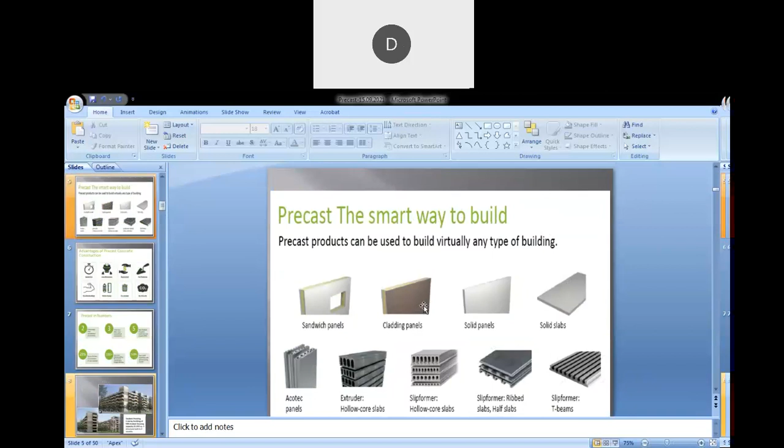Sorry to disturb you, sir, your slides are not changing. Please go to full screen. I am already in full screen. There are many slides, which slide are you on? Are you still on the first slide? No, I'm scrolling it down. And now it is visible. Sir, please make it full screen for a minute. One second. So what can you read? Can you please read out the screen? It is not going to full screen mode. No, I have made it full screen, but it seems only you are seeing it that way. We are not able to see it. I don't know why. Just hold on please, go to the view option. I am already in view. See, it is there, you are sharing the window, it is very well there. You are seeing the screen now, with all your settings. Now I will stop sharing and share again. Yeah, better we try that, sir. Yes.

Am I seen? Is the screen visible? Screen is visible, sir. Now, if I... No sir, it's not coming. My bandwidth is completely healthy, my internet speed is very healthy. I checked it, I don't know why. This should not happen.

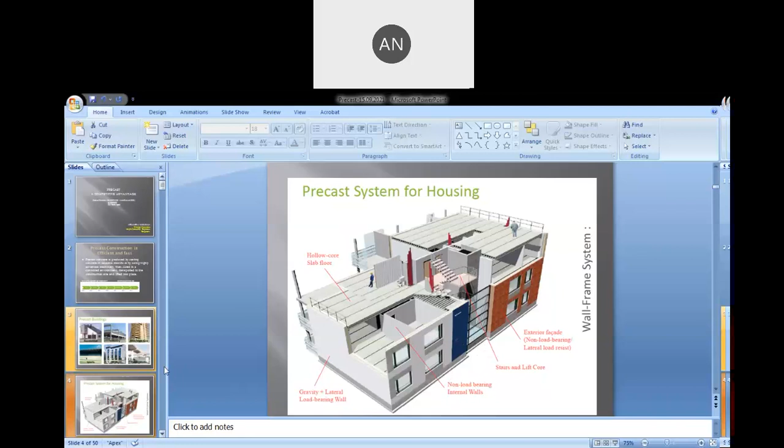Now, precast system - any component involved in building construction can be answered by precast technology, right from footings to terrace. Any component of a building can be precast. Flooring systems like hollow core slabs - there are many options. Precast is a smart way to build because it can answer flooring systems, a lot of options are available. Bridge decks, solid slabs for floors and also for walls - all these sectors, half slabs. These are some things like the hollow core slab.

Can you see my cursor moving around? Hollow core slab, half slabs here - it is half of this. So this is also a wonderful tool for the construction industry. It can save a lot of time.

Advantages of precast concrete construction: it is fast, yes. It involves low manpower, yes, because of repetitions involved even during manufacturing. Economical, yes, only if there are volumes - if it is constructed in volumes, it will prove economical. Form finishes will give better appearance, so plastering can be avoided. Durable buildings, quality control is achieved.

Yes, it is durable. Most of the architectural demands, most of the forms in architectural demand can be answered through precast, so better design, better appearance rather. Wastages are minimized because these precast elements are prepared or manufactured in a controlled environment, so wastages are minimized, so it is eco-friendly as well.

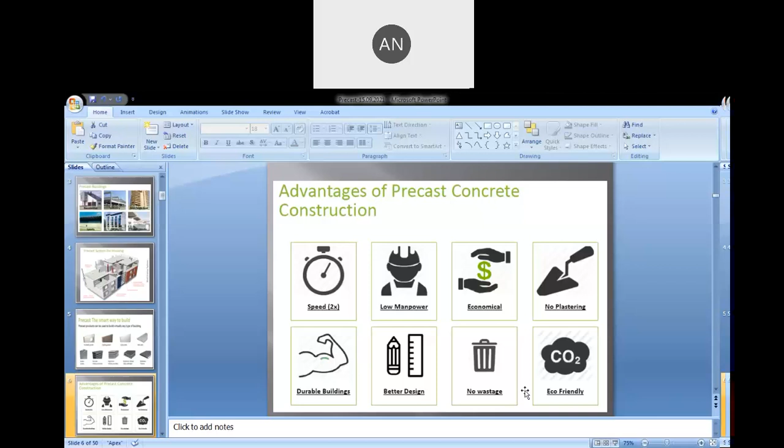Precast, if we give numbers to it, is almost 2 times faster than our conventional construction system, and 3 times less labor involved - this is, of course, from a report. Almost if you talk about machinery and molds involved in manufacturing of precast elements, the capital expenditure involved, the payback period for that capex is 5 years on an average.

So 25% less consumption of raw materials, yes, because it is manufactured in a controlled environment. Life of the building is improved, certainly more than our conventional construction system. Molds can be repeated over 5,000 plus repetitions, which is a very added advantage even to the yard. Finally, it proves very economical, of course, rather, when there are volumes in construction.

Certain snapshots of precast structures in India which have happened earlier - just to give us a glimpse of the advantage this precast technology can bring in.

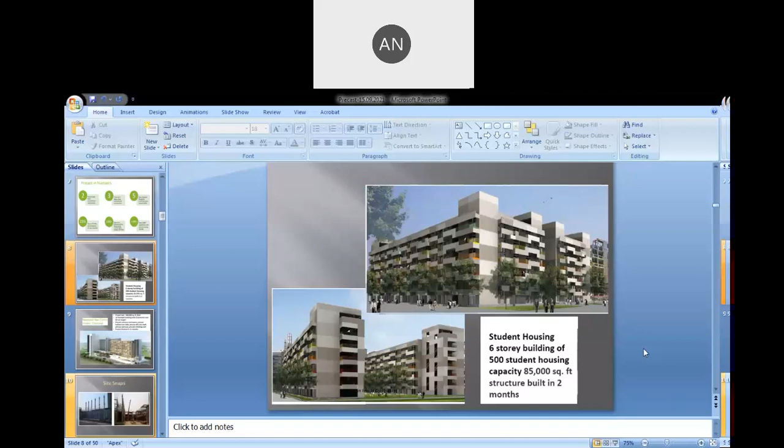This is one more hotel in Chennai, 3 lakh square feet built-up area, 14-story building, hollow core slabs for floor, precast hollow core slabs, precast columns and beams involved, precast lift core, shaft, precast staircase, retaining walls. It is finished in 11 months - it's one more testimony.

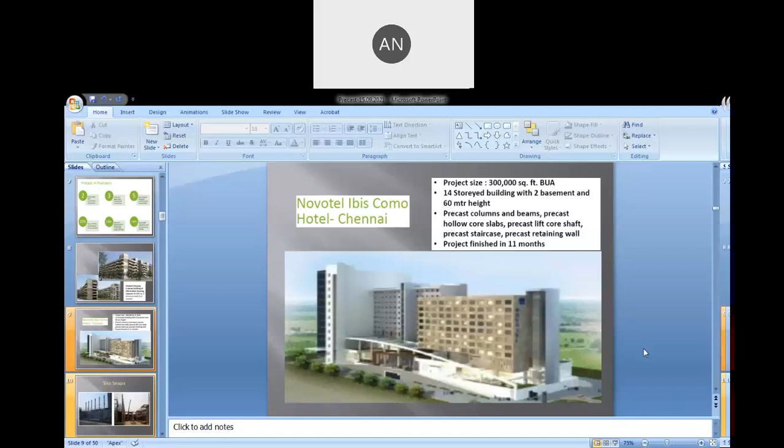A general glimpse of how a column along with corbels looks like. The corbel will receive horizontal members, beams or slab. This is how it looks when it is in progress at the site. This is a snapshot taken when the site is in progress.

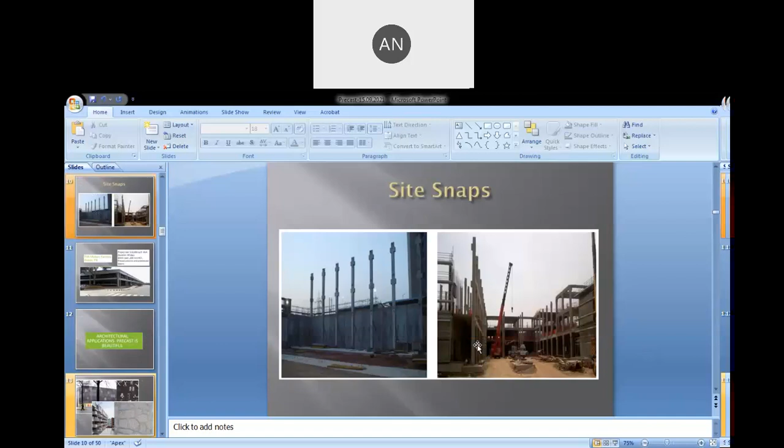Not only manufacturing, now when we talk about precast industry in building construction, it is not only the matter of manufacturing the structural elements to quality. One more very predominant thing which a designer or executing engineer should see is how to transport it to the site and place this geometry where it is intended to go.

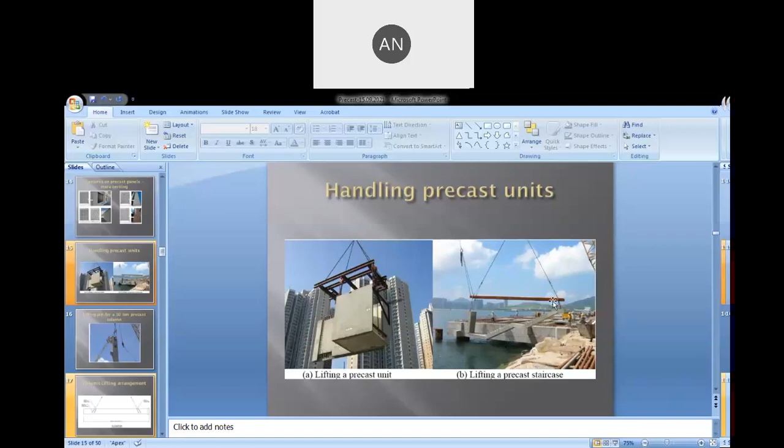Putting it in place, you can see certain photos, snapshots of lifting a precast unit and erecting it at heights, hoisting it to heights. Horizontal elements too - here it is lifting a precast staircase and placing it. You can see that in this photo.

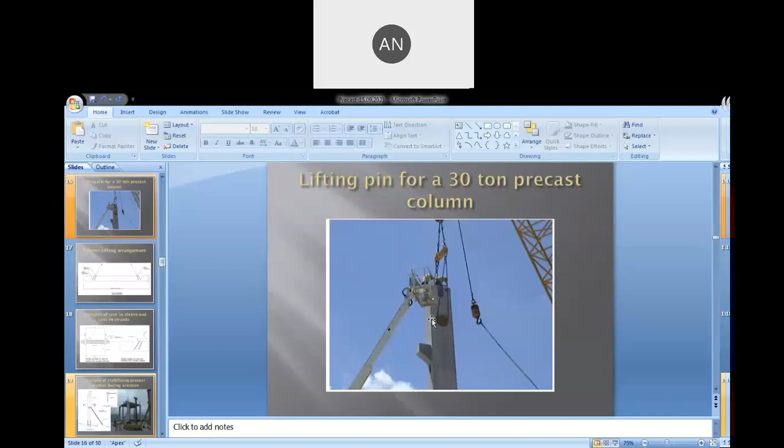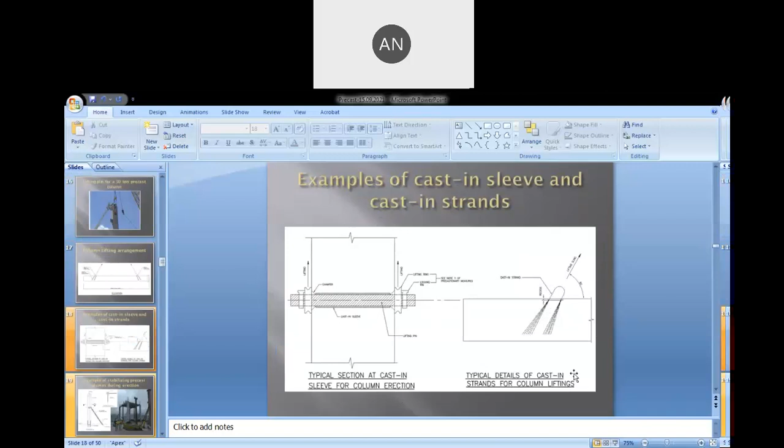The eye we saw - I will just go to the earlier slides. Here, this lifting pin we are talking about, this detail is shown below. Typical details of cast-in strands for column lifting, which we saw in full - it is a part view of this view.

Hollow core slabs, beams, and decks - I think I have to share another file. I will do that later. I will show you hollow core slabs, beams, and decks in a different file.

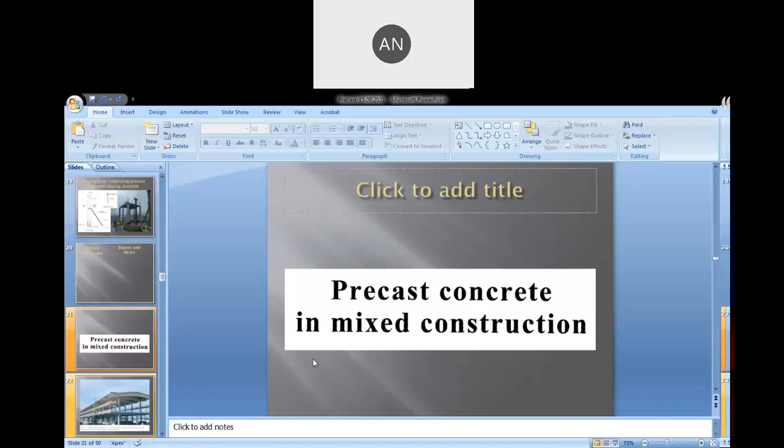Precast concrete in mixed construction - how does it look like? See here, it's a mixed construction using precast concrete and timber. Columns are precast, while the floors and roofing system comprise timber sections and roof.

Recently, I was involved in one project in Iraq - a building for public affairs, the Ministry of Human Affairs, Iraq. There, the facade system was made with a foam concrete facade system, just to minimize load. It was around, I think, a 75-story building.

There, using wind tunnel inferences, we had to finalize the sections and design the facade for that building.

That is again a precast example. Now see mixed construction using precast concrete and timber, both indigenous materials local to the construction industry, in Norway. It looks very charming and beautiful.

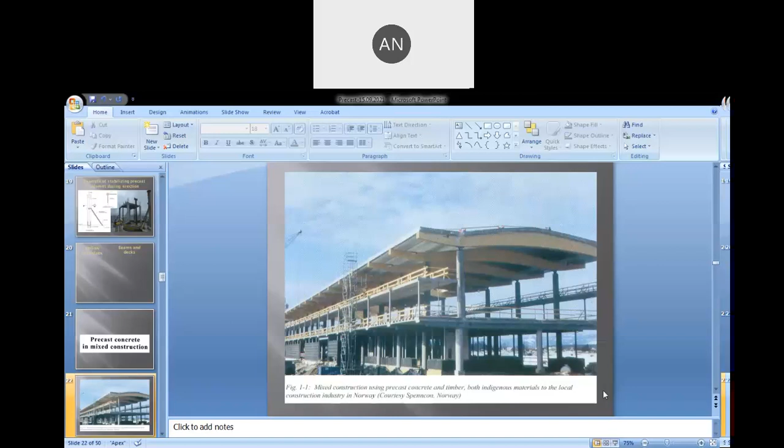This mixed construction is also possible with precast, mixing precast concrete and structural steel works.

Precast concrete floors and brick pillars form both the structural elements and the architectural facade. The statement is its appearance.

See other materials that can be integrated with precast concrete: structural steelwork and timber roofs on precast frames, precast floors into steel and concrete beams and masonry walls, profiled metal decking on precast beams, and precast frames into cast-in-situ foundations and retaining walls, and so on.

Precast frames stabilized by masonry walls or steel bracing, that is also possible.

Precast cladding in steel or cast-in-situ frames, and otherwise glass curtain walling, stone cladding, and metal sheeting into precast concrete frames, that is also being tried.

Steel and timber glazing, all these features are seen in one of the buildings in Finland, standing tall.

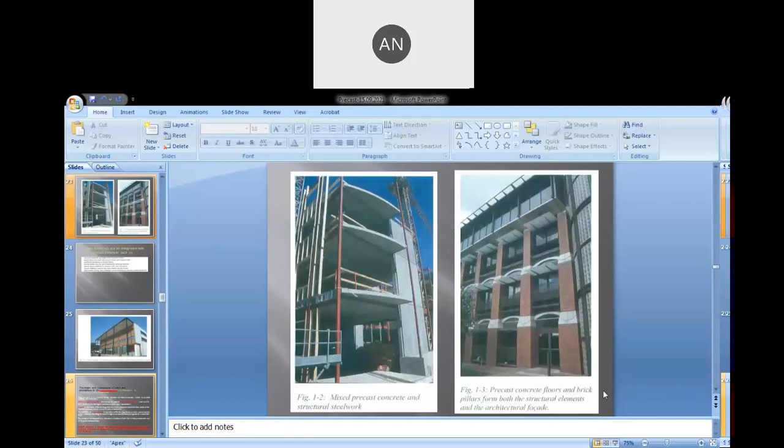That is about precast, and that is about the mixed part of precast technology.

When we talk about precast buildings, not only the members which are designed earlier matter; the basic necessity is also to think about how effectively the connections are designed.

The design and construction of joints and connections is the most important consideration in precast concrete structures. Their purpose is to transmit forces, that is all known.

All of us know that connections are intended to transfer forces between structural members and/or provide stability and robustness.

In a single connection, there can be several load transmitting joints. This means we need to know the difference between a joint and a connection, and so it is first necessary to distinguish them.

A joint takes place at the interface between two or more structural elements. There is a small typographic error here - a joint is the place, the interface between two or more structural elements.

So a connection is, under the action of forces,

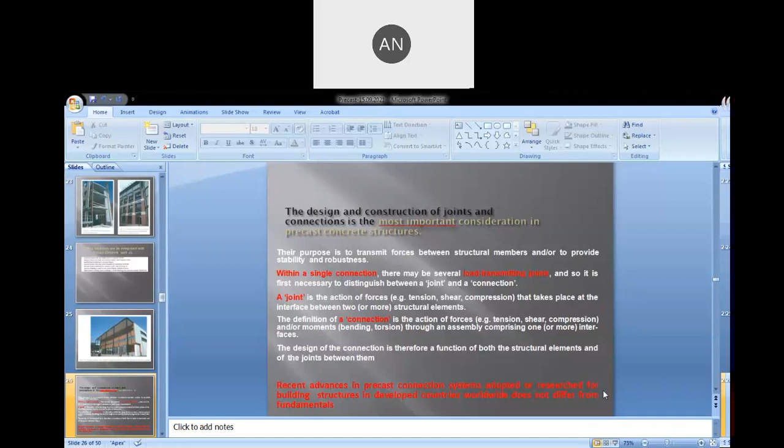In whichever country, in whatever form the connections are designed, it doesn't deviate from the fundamentals. So the economy of any precast construction is related to the number of connections involved.

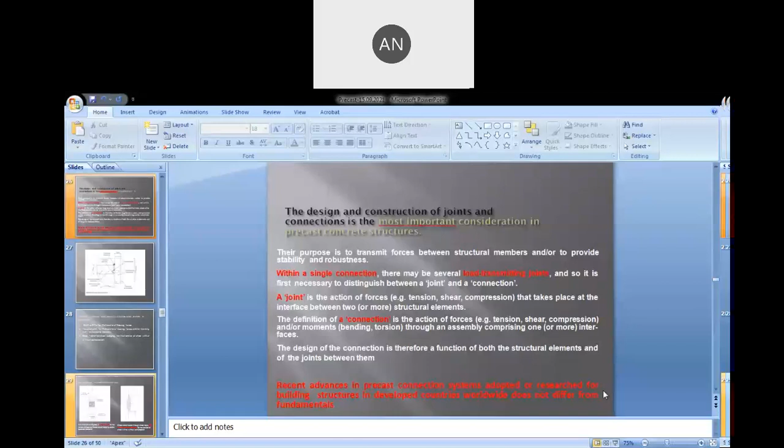So when we talk about connections, the economy of connections means we have to minimize the number of connections, and it should be practicable and constructible.

Whatever design is being proposed should be translated into easy construction at site. That is one of the foremost things to keep in mind while designing a connection.

The most commonly used method of connection analysis in precast is the strut and tie model. We know this, as it is even applied in pile cap designs.

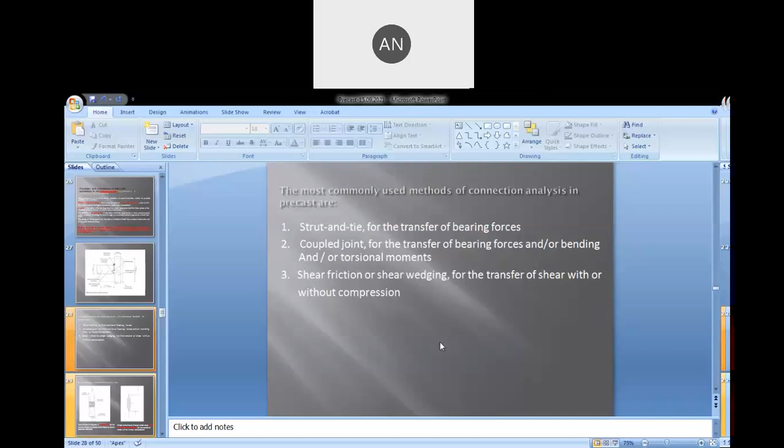These are two of the most commonly used methods of connection analysis. We can talk about a coupled joint for transfer of bearing forces, as shown here.

Some types of column splices require some continuity to be achieved, so we need to have splices in various stories of the columns erected.

For transfer of bearing forces and/or bending or torsional moments, there is the column to column splice, and shear transmission through shear keys.

There is a process for this transfer of shear with or without compression. Shear keys are one of the answers usually followed in precast connections.

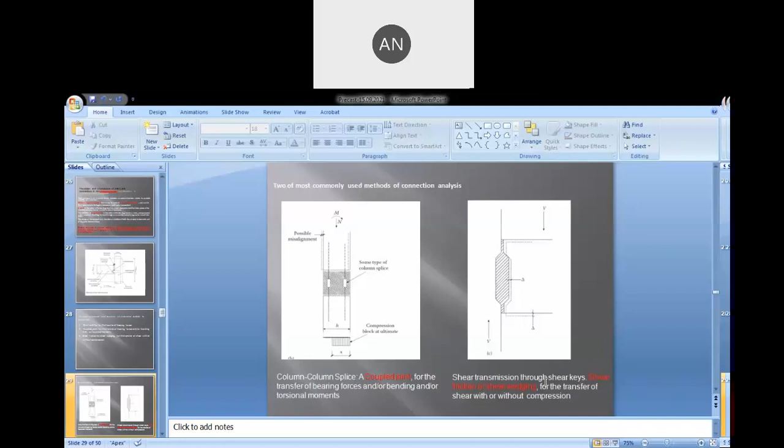Compression joints - we can see force transfer through compression joints having an elastic modulus which, in this case, is less than that of the precast member itself.

If we are using a similar material which has the same elastic modulus as that of the precast member, sometimes it can be greater as well, and sometimes the same.

The medium of splice can also be of lesser size than that of the precast section. This case is also encountered in practice.

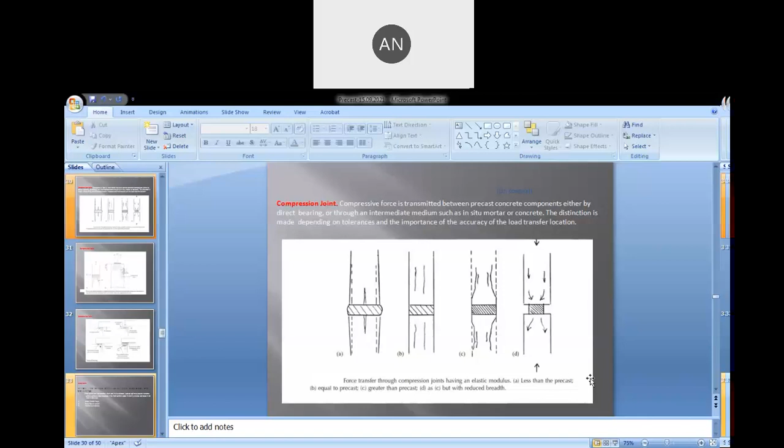Compression zones. How to identify compression zones in a precast element connection? Base plate, anchor connectors. So compression zones, how to identify them?

While sizing the section B, at this intersection, usually this dispersion angle is around 30 to 45 degrees. The interception of this stress zone, if we talk about right from the base plate, from the edge of the base plate, it should not be greater than 2 times B minus BP.

Somewhere precast elements should transfer forces either by bearing or by shear. So when we talk about joints, the types of bearings are also important.

So dry pack mortar is the mortar generally used for packing the holes created because of tie rods during construction, like walls or columns when the sizes are large. To prevent formwork from getting heaved, tie rods leave holes in the constructed member, and dry packs are used to fill that. So it is the same mortar, dry pack mortar, and wet bedded mortar, which we know as our usual mortar bedding.

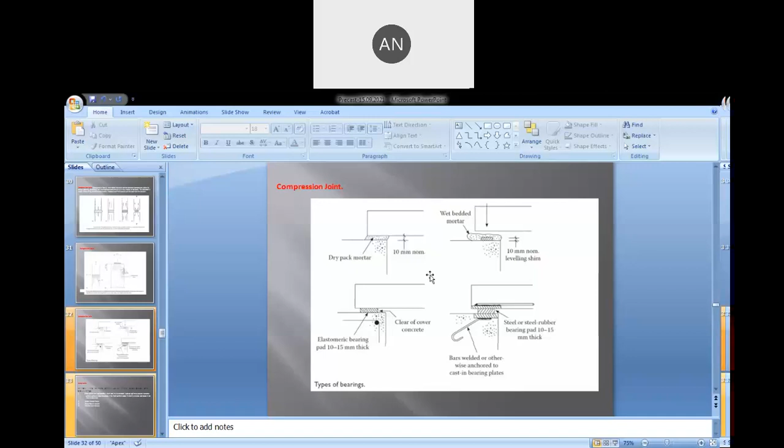Now, when we talk about bearing, and when we talk about shear joints, shear forces can be transferred between concrete elements by one or more of the following methods. Shear adhesion and bonding means when cast in situ concrete is placed against a precast concrete surface, it is self adhesion - the shear resistance because of self adhesion, just one over the other without any other mechanism.

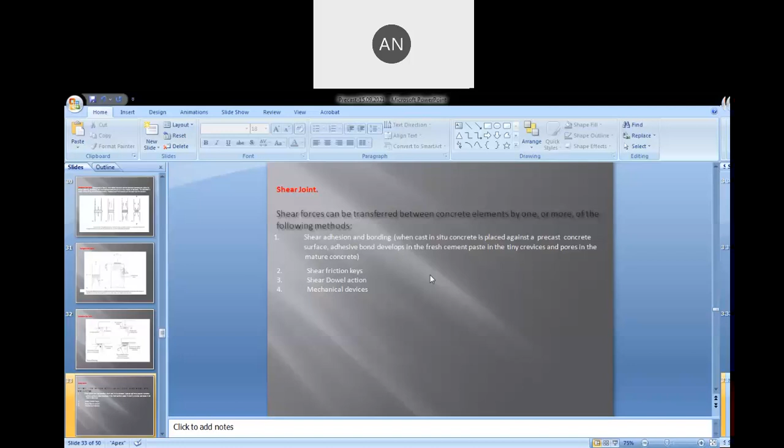The only other means would be an adhesive, like an epoxy. It can be an epoxy application just to retain, to hold the old and new concrete surfaces together. That is possible. Shear friction keys - we will see that in further slides. Shear dowel action, mechanical devices - these are all the means through which shear transfer can happen.

It is just a sawtooth model to indicate the friction between surfaces, the interface between. This happens in the hybrid case of precast construction, where we have precast construction with rebars or dowels left in place, keys left in place. Later on when pour happens, the shear resistance is sometimes sufficient in narrow spans.

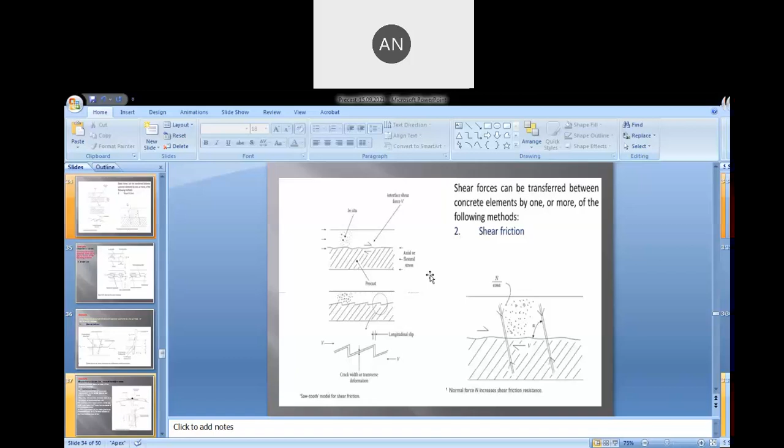Whenever this frictional resistance is insufficient, dowels can be inserted. Shear forces can be transferred between concrete elements by one or more of these methods, like shear friction, normal friction, and next by using shear keys.

Shear keys - the arrangement of shear keys defines and offers various zones like high compression zone. It is just to anticipate the possible cracks and look into the possibility of where we should insert dowels, where we should give additional assistance to take care of forces.

Now, when we talk about shear joints again, dowel action - as I said, insertion of dowels at pre-calculated spacings. We can identify the possible failure zones where cracks can happen, analyze the probable resistances required, and introduce dowels at pre-calculated spacing.

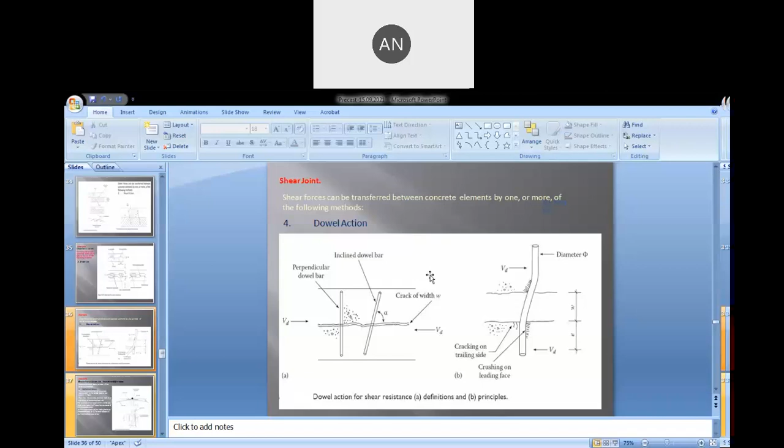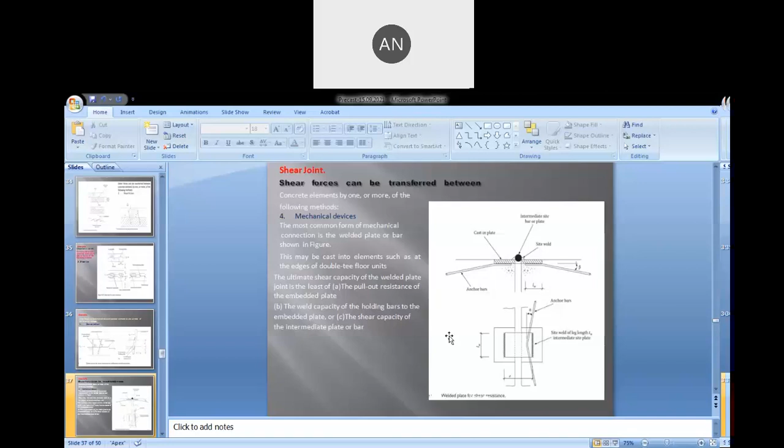The ultimate shear capacity of a welded plate joint is the least of three values: pull-out resistance of the embedded plate, the weld capacity of the holding bars to the embedded plate, or the shear capacity of the intermediate plate or bar. The least of these three defines the shear capacity when mechanical devices are involved.

Main cost elements are fabrication and material costs, and those rise steeply with increase in connector capacity.

You should avoid too many connections. Simple connections are always better. Precast designers prefer the complicated aspects of the connectors to be under the control of the factory, reducing site operations to simple doweling, bolting, or welding at site. When we talk about major moment connections, the major fitments involved in this assemblage should happen in the yard. When it comes down to site, it should be boiled down to either simple doweling, bolting, or welding.

The economic and functional success of a precast concrete structure depends to a great extent on the configuration and properties of its inter-element connections. The strength of connections remaining after the demands of volume change, gravity loads, and dimensional or alignment corrections has to be satisfied, and it determines whether the structure will deform permanently under action of extreme wind or seismic loads. These are all design aspects which have to be taken care of.

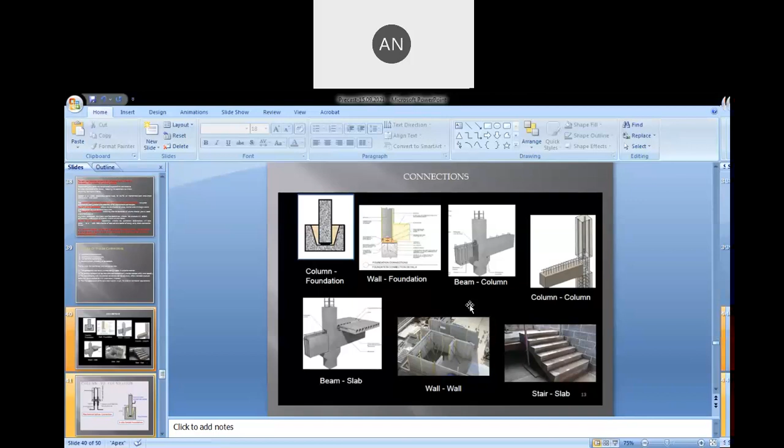Column to foundation, mechanical means, just a means of anchorage. One is the socketed one, you can see. H is the largest lateral dimension of the column, not the least. The socket length should be at least 1.5 times H.

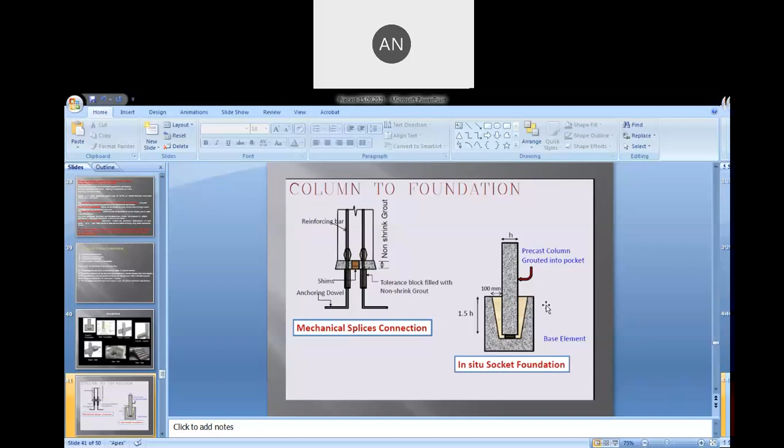Like what we do in steel, in pre-engineered buildings, base plates are aligned. Anchor bolts are already set into the columns, pedestals. Base plates are put in, aligned along with the columns erected. It is aligned and placed to facilitate non-shrink grouts later on, using wedges and shims. Same here also, the same practices are followed - shims and wedges under the base plates to facilitate grouting.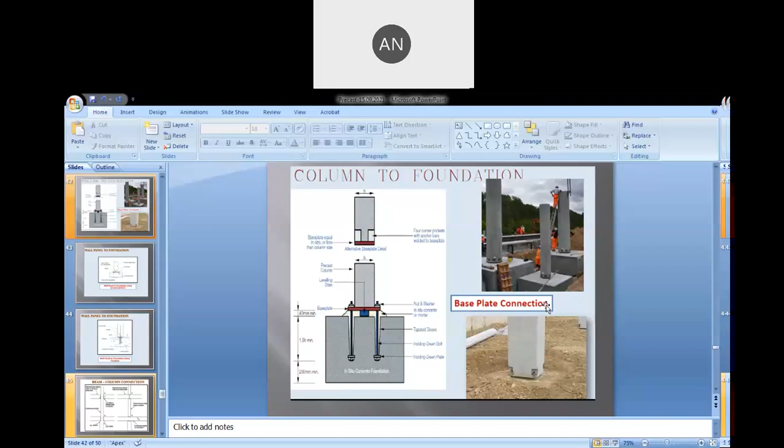The connections in precast sections don't differ much from our steel structure connections. We can take a lot of guideline from steel connections to design connections in precast.

This is wall panel to foundation using cleats, called wall panel clips here. It is used.

This is another way of connecting wall panel to the foundation, by using studs, and also couplers can be used, mechanical couplers, which is hand tightened.

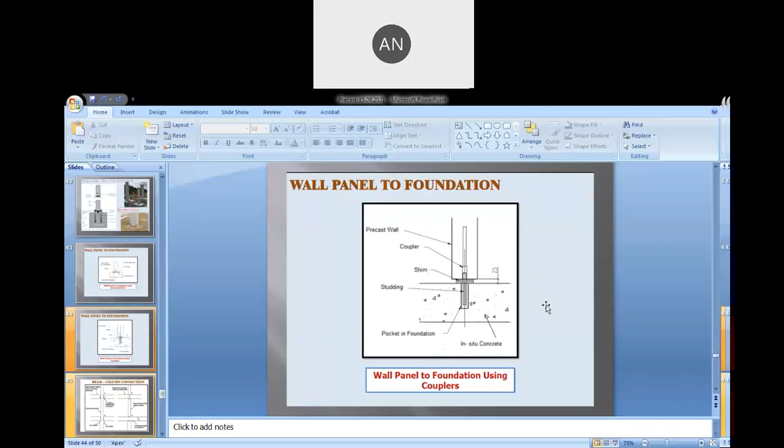There are various possibilities when we talk about continuous members, like continuous beams over columns, at different levels. Discontinuous beams can sit on the column or wall at various odd levels as well. We can also talk about mezzanine floors, so those connection cases do come up.

Corbels are a very usual component, corbels and nibs. Continuous beams, you can see here. The connection being displayed here is called a scarf connection. This will economize the connections like anything, and it is very simple to design.

Billet connection - I will show you photographs of that later. That is another mechanical means of connecting.

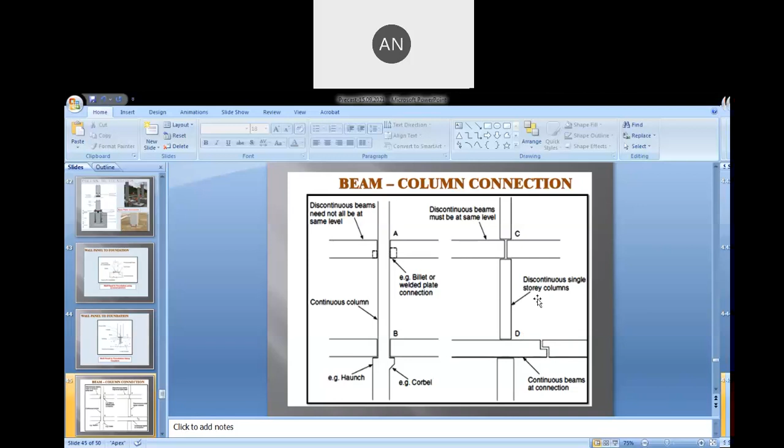When we talk about beam column connection, imagine we don't have a corbel, we don't have a bracket. So how is it done? Precast column, even before the precast beams are erected or kept in place, dry packs are kept in just to facilitate bearing.

Grouting holes and tubes are there. After this, projecting reinforcement bars from lower columns are taken into the slab, into the precast beam. Precast column is snugly placed on top of these reinforcing bars and anchors, with sockets left free in the precast column member while manufacturing it in the yard. These grout tubes and grout holes are filled in later by non-shrink grouts, usually of the same grade as the member.

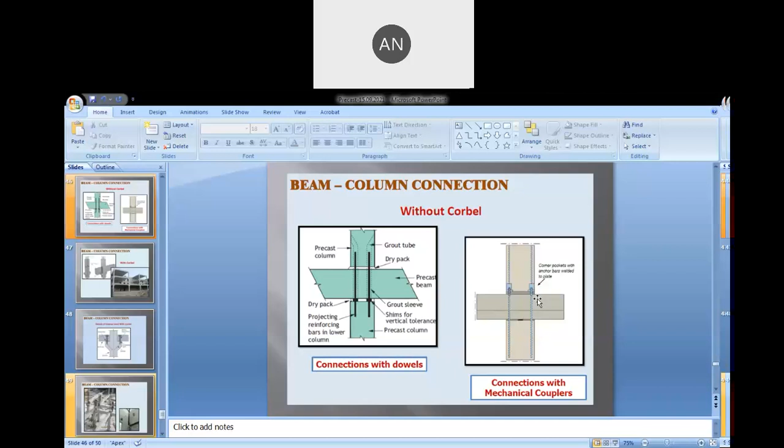Beam column connection - again, you can see the beam sitting on corbels. Corbel connection, we will see this. Take a look at this.

A corbel - how is any member made to sit? The corbel will receive these members, with preset anchors into the corbels. Certain sockets, certain portions, box-outs as they're called, are left in the corbel, which will have bolt attachment getting into it. Grout holes are left later on after placing and aligning. Before the precast members are made to sit on the corbels, sometimes a bearing medium, an elastomeric medium - a specialized rubber medium - is kept in place. Over that, the precast member will sit, and after that all the finishes will happen.

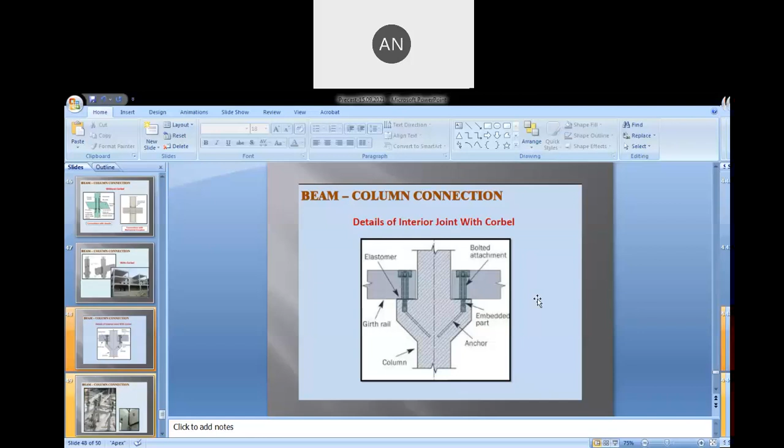When we talk about beam column connection, this is a case of a hybrid precast member. We can see a lot of key reinforcement left in the precast member. This is to facilitate receiving the topping on top. This topping can be a hollow core slab, usually with certain topping, poured along with the concrete along this part of the beam which is exposed with rebar keys there.

There are some more parts which I have to share. I will share it in a different slide. I will stop sharing this and share it in a different slide.

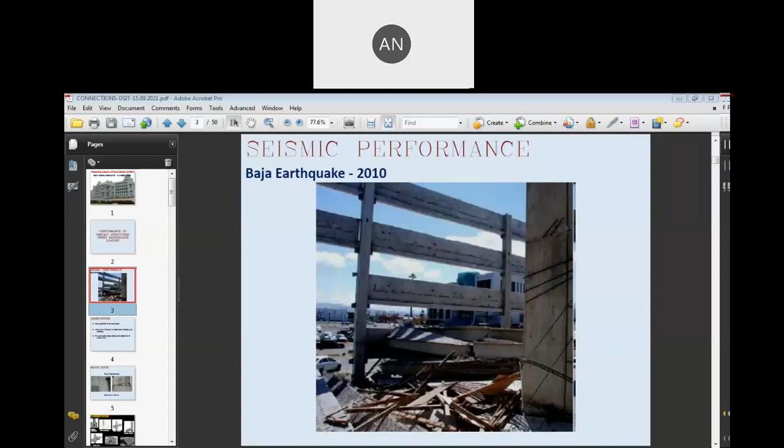You can see where we need this - column to column splice, on the right hand side. You can see the grout has yielded, and a structural crack has developed. We can think of making something better, accommodating a better connection demand under these situations. These are poorly detailed connections - that's what we can see.

Is the screen visible? Hello? Yes sir, yes sir, it is visible sir. Okay.

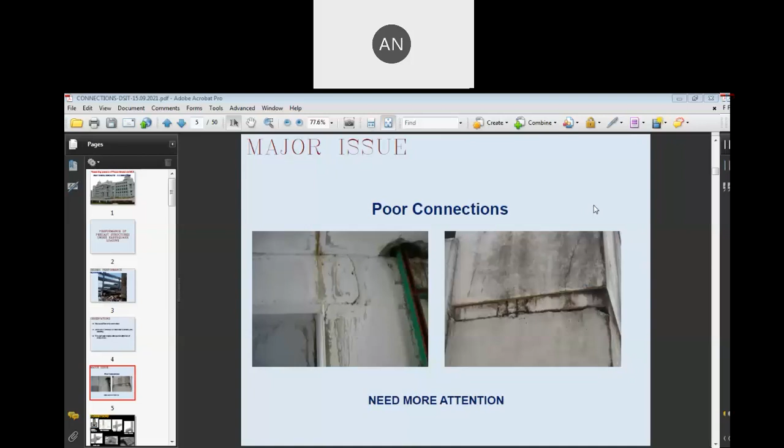Again, the same—I have just taken some excerpts here which we have seen in the earlier slide. Connections: column to foundation connection, wall foundation connection, beam to column connection, corbel connection, column to column connection splice, beam to slab connection. It is like hollow core slabs to precast beams. We can see rebar keys left.

Wall to foundation, wall to wall connection, and wall to base slab connection. Here there will be integrator keys, reinforcement keys for wall to wall, connecting wall to wall.

Staircase to slab connection. Again, this connection will happen with these type of staircase along with the floor slab. It is connected in hybrid precast construction. Only topping—it will get integrated once the topping is there, because the keys are already there while casting this staircase component in the yard. The staircase is also precast.

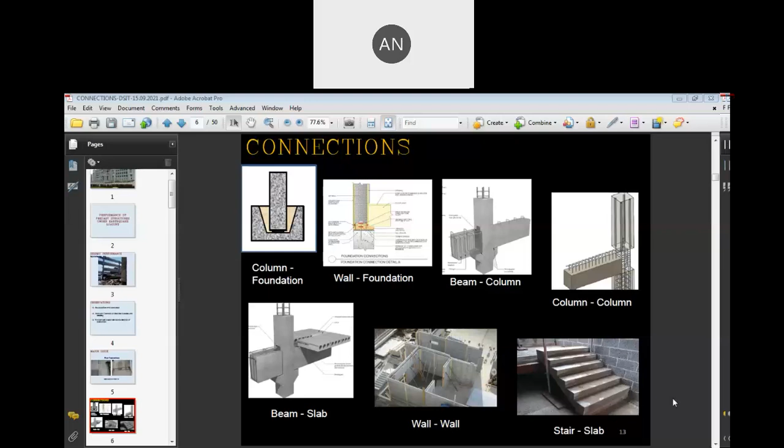How does it look like? Mechanical splices, socket connections. This we have seen in the earlier slide.

Whenever the bearing stresses are predominant, this is also a case possible wherein you can see 12 sleeves with 60 mm diameter left within to facilitate grout when there is very dense reinforcement needed, while during design of a section for a soft story, enormous bearing stresses do come along with shear stresses. You have to look into it and design accordingly.

You can see 12 bars of 32 mm diameter, so dense. These kind of splices, the grout holes, everything is there, is done.

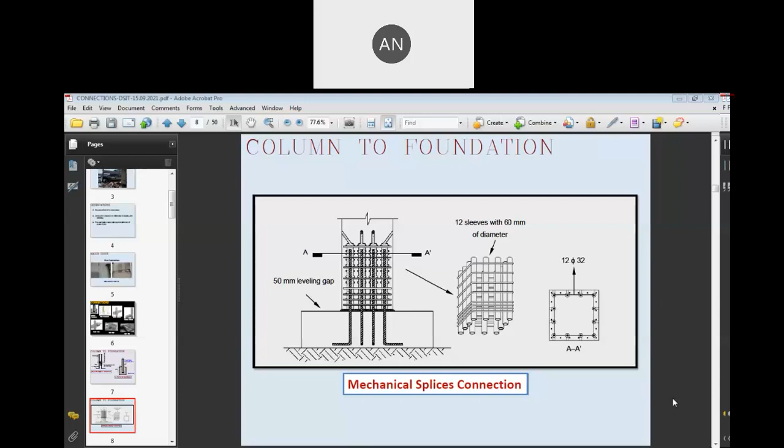Base plate connection—you can see the snapshots. How is the column connected to the footing with a base plate? Base plate is pre-inserted into the column. Rebars are left from the footing. It is aligned, and post that it is grouted. This we have followed in around 8 buildings in Thailand.

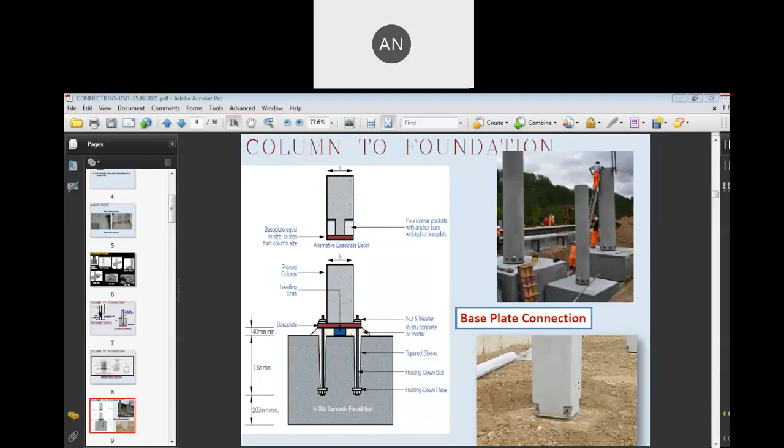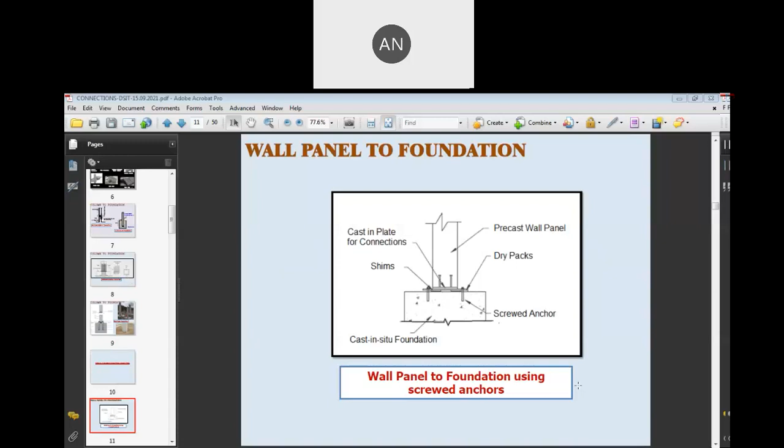This is one more case where wall panel is set into the foundation. Precast walls, couplers again—it's a mechanical coupler again.

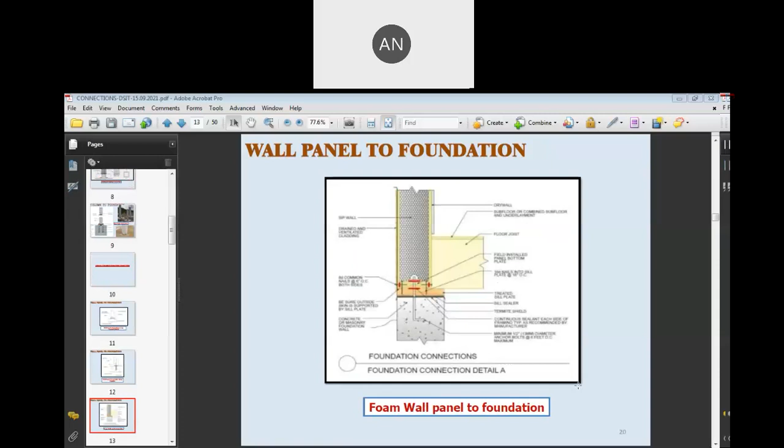Studding means it is nothing but an MS rod, just like an anchor bar. J bolts, an anchor bolt, which is for walls, which is set in. These are also more possible detail.

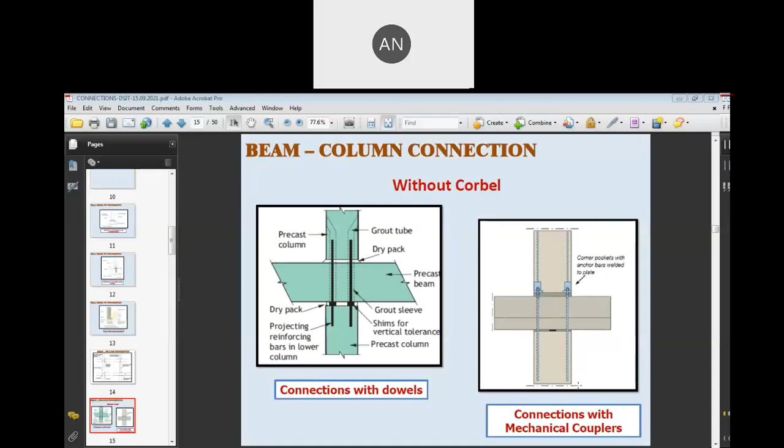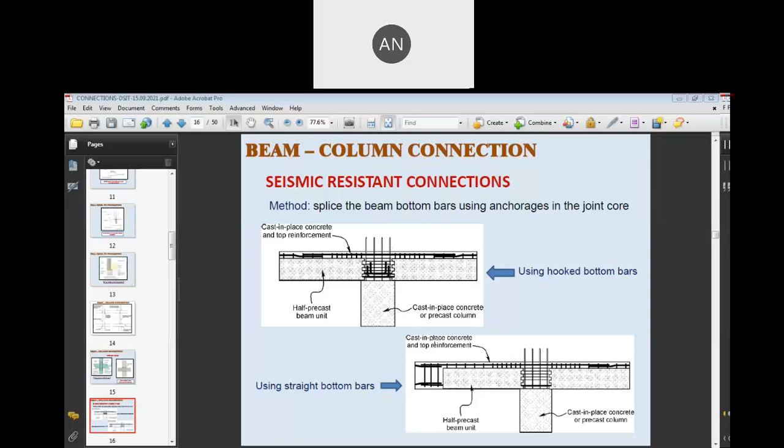This we have seen. Interior joint means corbel and horizontal members. It can be a slab or a beam sitting on a corbel.

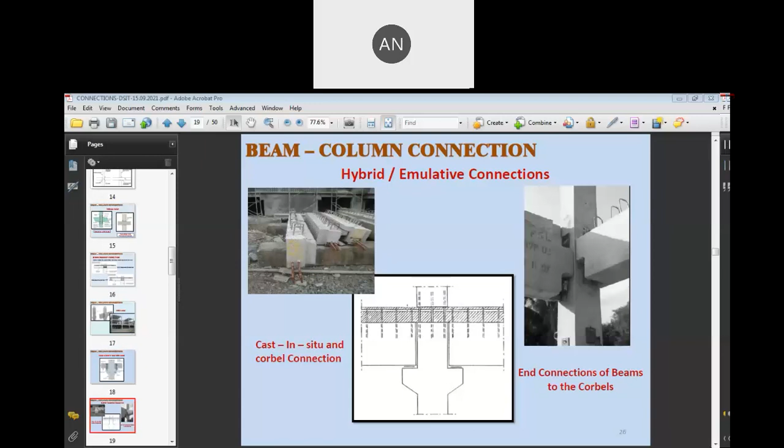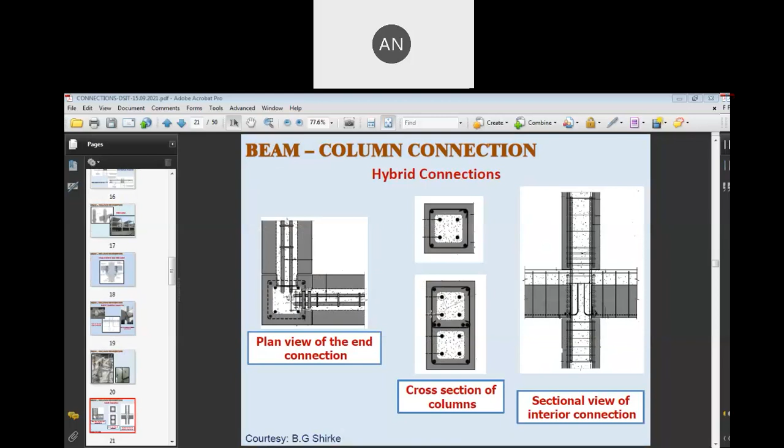This is hybrid connections. These are all the keys which are left in precast members in the yard, so it is poured later on. These are all the photo snaps. I'll show site snaps of this here.

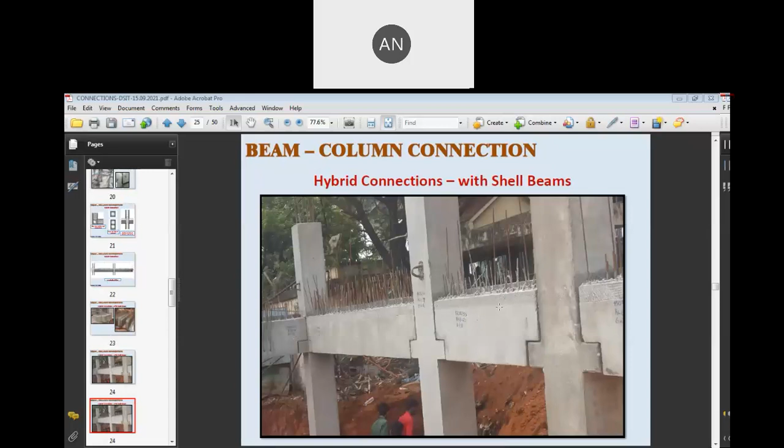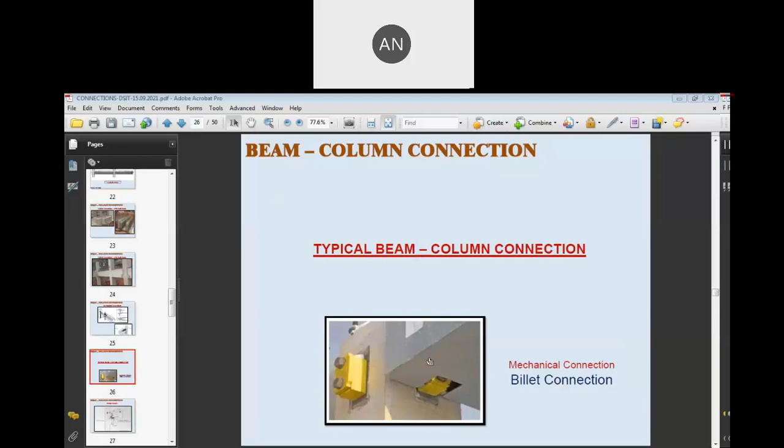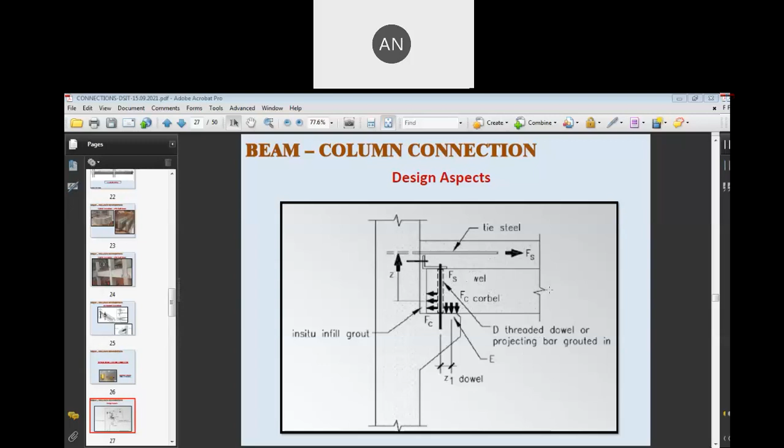We need to set in a dowel. There will be a dowel action, so we need to design those dowels. Bearings we need to design. Tie rods to take care of continuity and maintaining the joint—we have to introduce tie rods. These are all one of the representations of design process. That's all, nothing much.

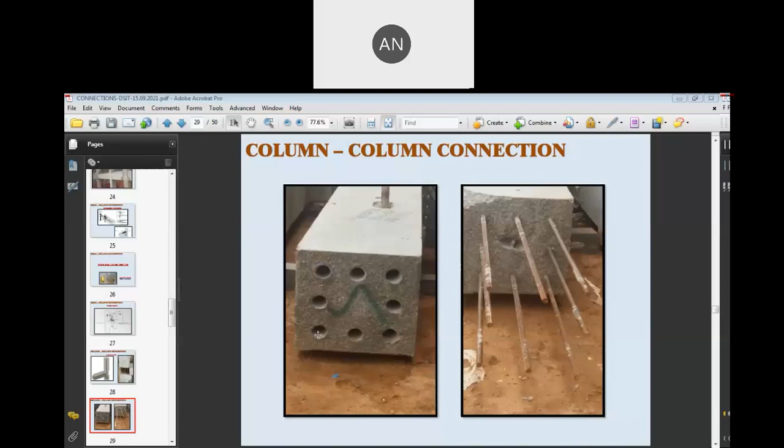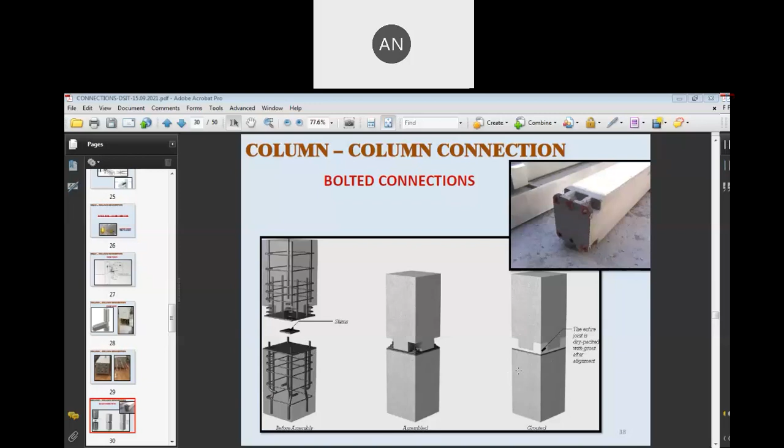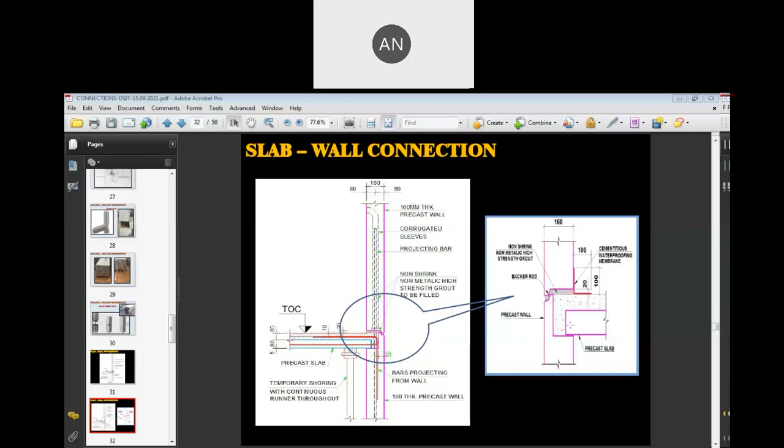Slab and wall connection again. We can see these two ties given here, loops, which are preset into the wall, and later a rebar is kept in between. The gap between two wall panels in plan, the bottom small portion you see here, is sealed along with a backer rod. The backer rod is given in the back, along with the sealant, to fill this gap.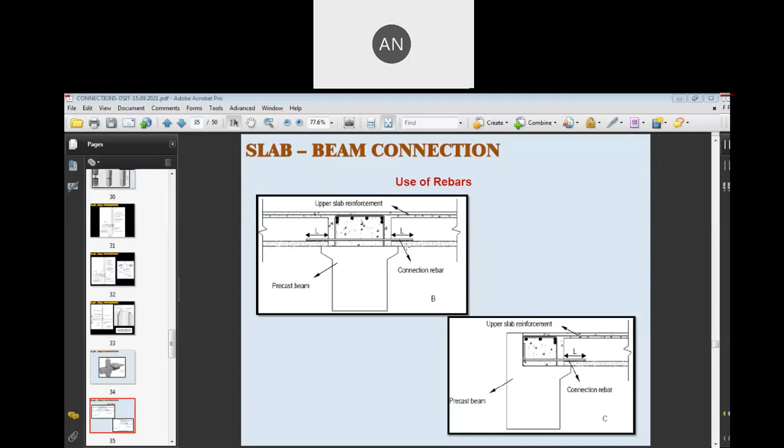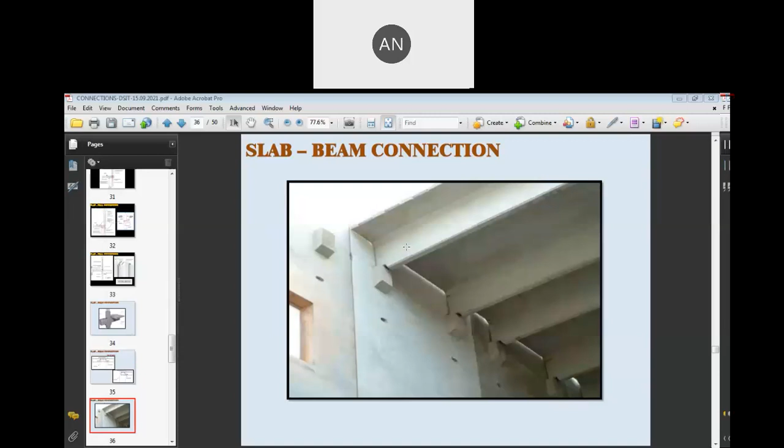Slab and beam connection, one of its kind. This is a bearing type connection. Here is another snapshot.

Just a snapshot of site activity.

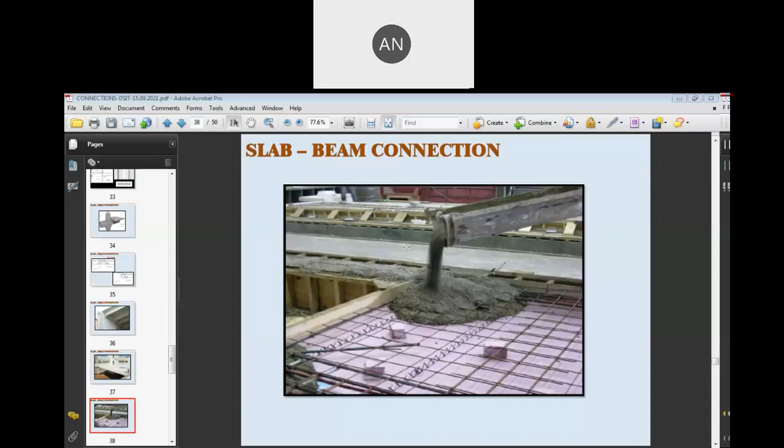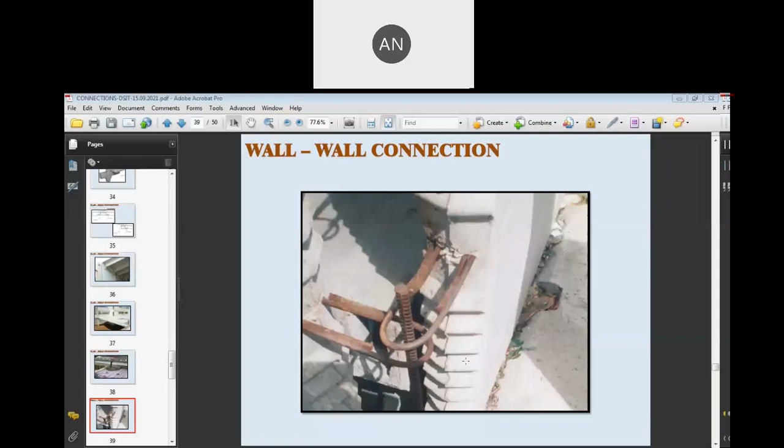Wall-to-wall connection - this is also possible. These are all grooves left earlier, later fitted with the loops, with the rebar loops. Later on, this will be grouted.

Wall-to-wall connections. We can see here, this is the pour.

This is the detail followed over this opening. You can see these, 1, 2, 3, 4, 5, 6, these places. A slug is nothing but a sleeve.

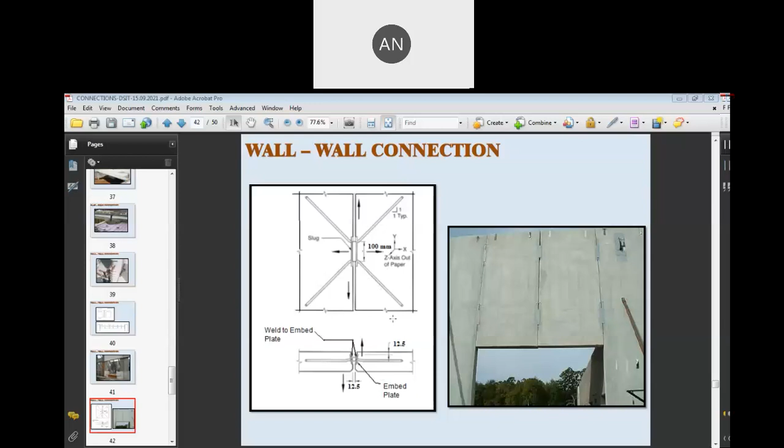Staircase - you can see it is just like a ledge, sitting on top of the precast slab. Topping will match that level difference, whatever is seen. The final landing is over and above the ledge, over and above the base roof slab, so that will be covered in the topping.

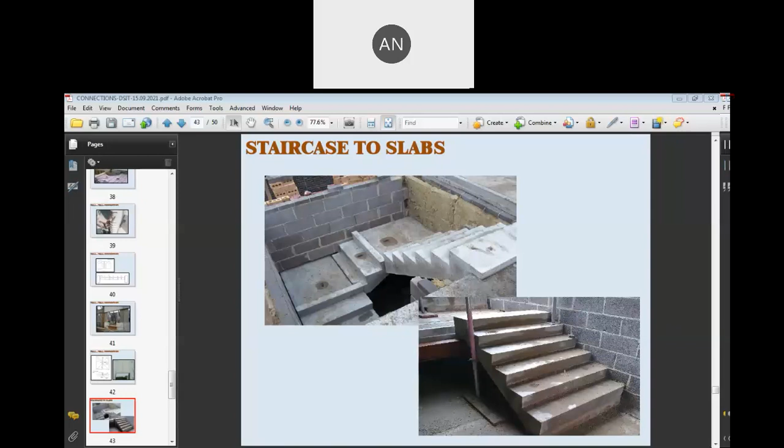These are all the precast staircases with cavities preset to insert rebars.

No, these are all keys - these are all cleats which are used to fix it, all floor connections. I mistook it - no, this is not the one, I have a different slide for that. This one is supposed to get into the floor system, connected into the floor beam. These are all cleat angles.

Applied finish to landing - this is what I was talking about earlier. The ledge will sit on top of the slab, which is already set into the precast, set along with the precast beams to make the flooring system. The ledge from the staircase will sit on top of this, finished neat.

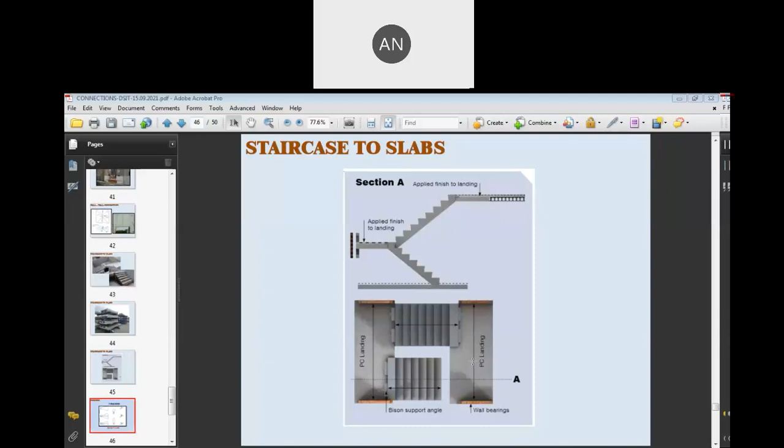These inserts, whatever is seen on the screen now, are for handling the precast members. This will be preset into the precast members to handle it at site - hoisting, all those things.

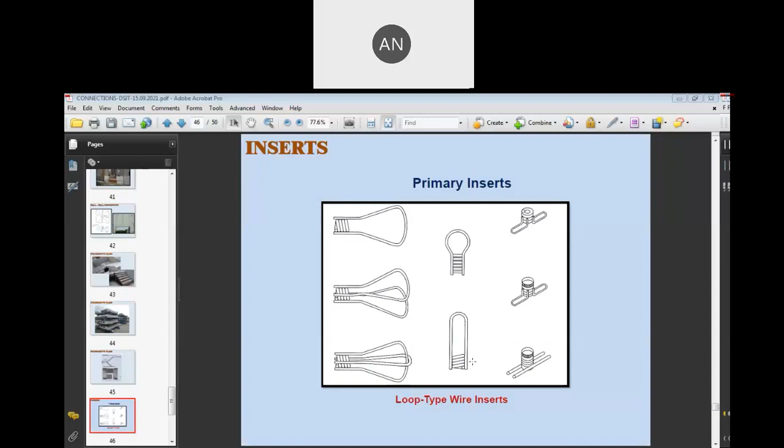These are all the names - these are all the primary inserts used. This will go into the precast member.

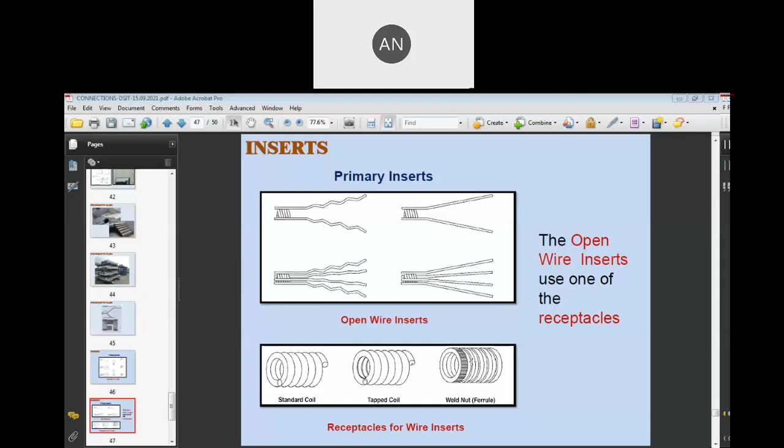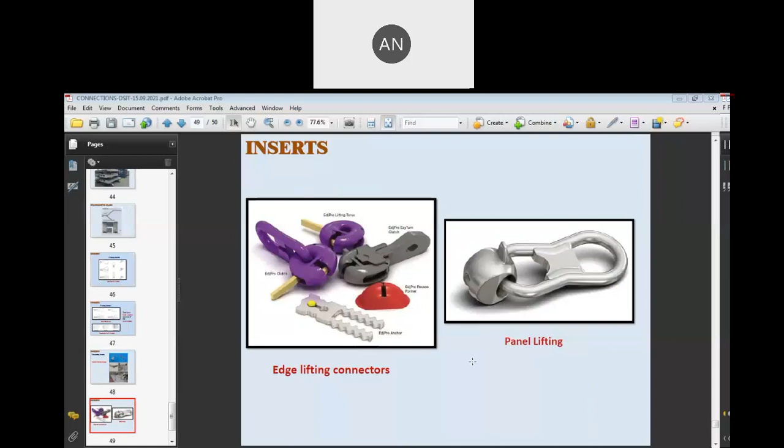Some more forms - wall panels, which are tilted up and hoisted. Lifting loops, you can see them in operation.

This is all I have now. I wanted to cover more things, but I don't feel the time is very sufficient.

Sir, thank you so much for your presentation. It was a purely out and out technical presentation where you have given us a lot of details on various connections and various precast elements. It was an excellent presentation, sir. Dear participants, can we take a few questions from participants, please, if you have any?

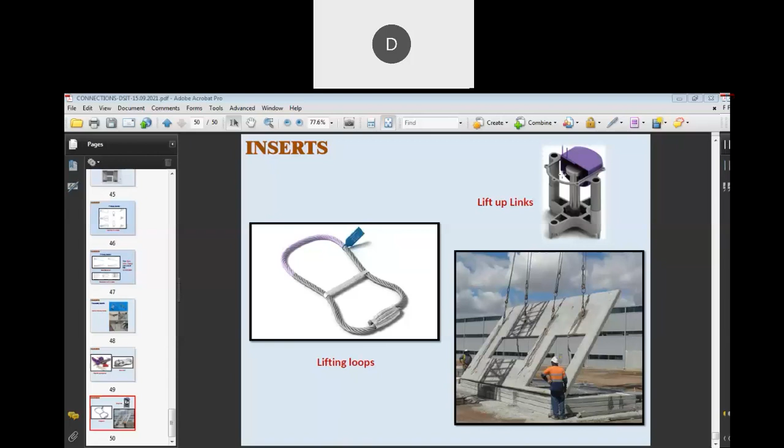I agree, I went on very fast, but there are a lot of things to share. Yeah, but the session was truly informative, sir. Though I'm not from a structures background, the amount of knowledge that you have shared, I feel those who are pursuing structures as their core subject can relate to it very well.